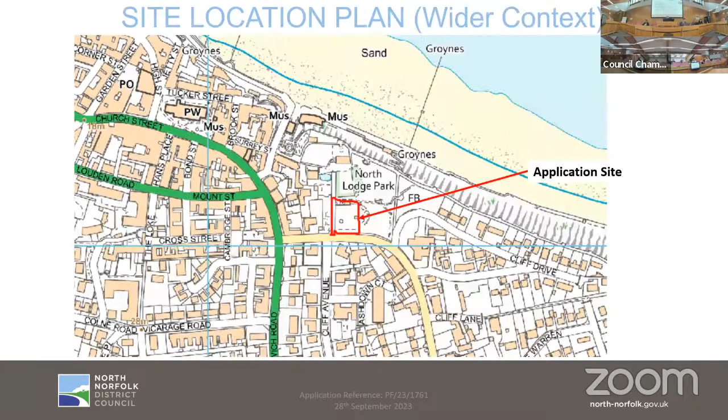So a map there for a bit more context. The park also forms the setting of the Grade 2 listed North Lodge. The former tennis courts and bandstand are considered to be an accessory to the asset.

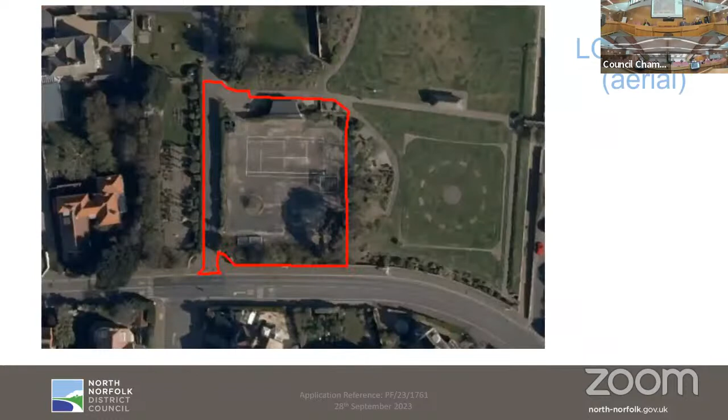The site as existing is comprised of a 1950s brick-built bandstand and a large concreted slab. Both have been unused for several years and have fallen into a state of disrepair, although the concrete area remains level and in reasonable condition. There's some photos just to show you the site as existing.

Below this, we have the horticultural hub, which is the fenced area containing a greenhouse, store and potting area, and a community shed. A portacabin is proposed to the southwest corner, which will be clad in vertical timber and sedum roof to match the other structures and would provide a food hub for the community.

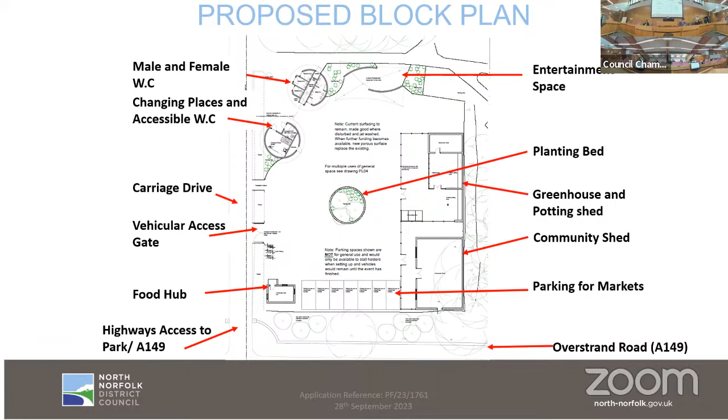Vehicular access is proposed from Carriage Drive along the western boundary of the site. There is vehicular access secured with a lockable gate and a further additional pedestrian access. Space has been set aside for occasional parking and cycle racks have also been provided.

The next few slides that will be shown are showing you a close-up of the plans of the structures.

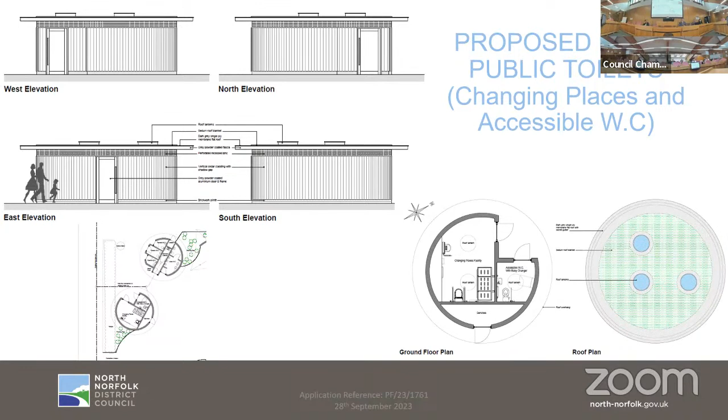This slide shows the proposed public toilets. They're circular, clad in timber and zinc, and one will have a green sedum roof. The next one has a polycarbonate roof.

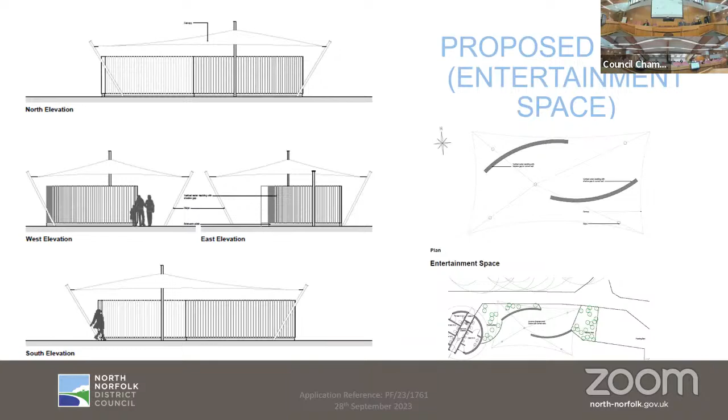This is the entertainment space. As I said, it's two curved walls, which will be clad in vertical timber and has a canopy above.

That's the community shed.

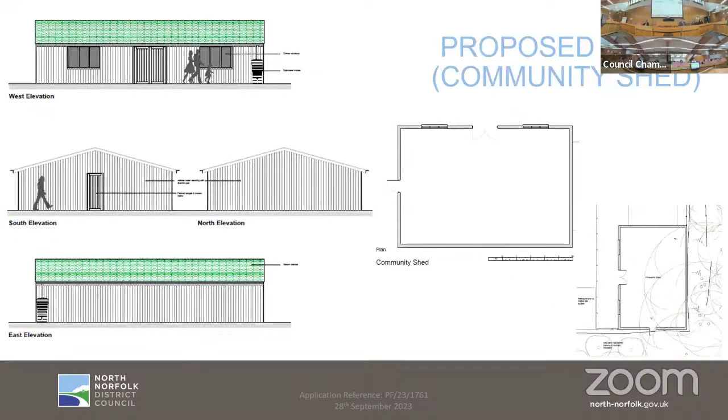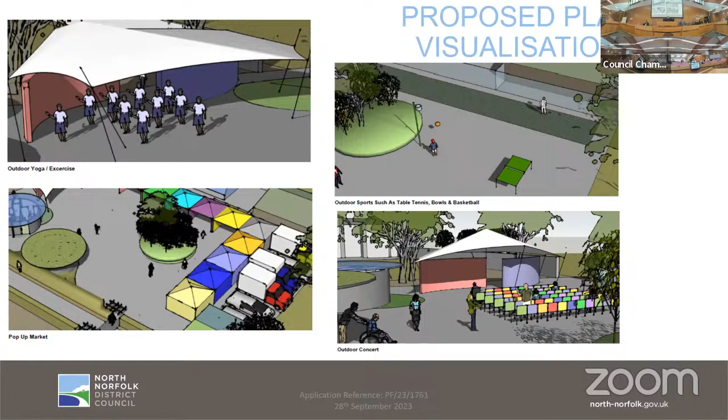The key issues for consideration on the scheme are highlighted here. In terms of design, the majority of the structures proposed are fairly temporary in nature, with low impact siting on the existing hard standing.

Whilst concerns have been raised in public representations regarding the open land designation of the site, officers recognise that whilst the proposals would not enhance the open character of the site, there would be an enhanced recreational benefit, allowing a currently underutilised area of park to be brought back into use and offering a number of recreational uses for the community. This is in line with CT1.

Some heritage harm has also been identified as a result of the concentration of structures in this area. Whilst the harm identified must be given great weight, it's considered to be at the less than substantial end of the spectrum. Nonetheless, this harm has to be weighed against the public benefits accruing from the scheme.

The public benefits associated with the proposal include the revitalisation and improvement of a currently unused area of park to promote and facilitate new recreational uses, as well as the provision of new public toilets, and a number of flexible community uses, some supporting the local economy, all ensuring the viability of the park.

Having regard to these benefits, and affording the identified heritage harm great weight, it's considered that these benefits would outweigh the identified harm to the heritage assets. Consequently, the proposals would be compliant with paragraph 202 of the NPPF, which deals with less than substantial harm.

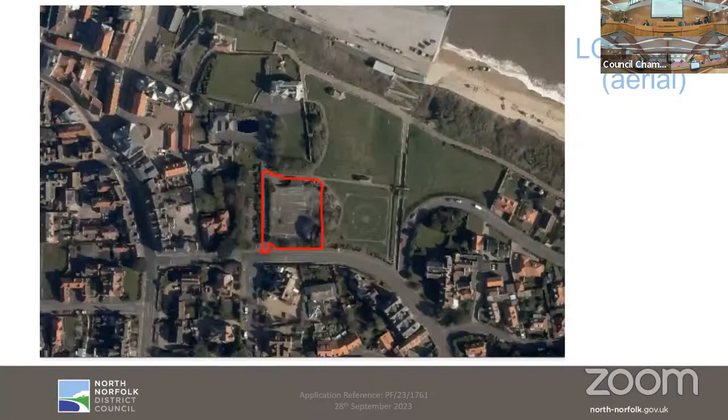Thank you, you've got 3 minutes, sir. If you just push the button on your microphone to make it live. That's the one, I got it.

Oh no, all right, well then, thank you Mr Chairman and committee for hearing me this morning in support of the North Lodge Park application. I just want to start by addressing the fact that we're looking at a 5 acre site here.

And within that 5 acres, the place we're looking to develop is 0.4 acres. This has been disused for a long time now, probably as long as I can remember, having been a resident of Cromer for the last 52 years. I spent many days down at Kiddie's Corner, as I'm sure some other people did, on the toys and everything else there.

The proposal we're bringing forward this morning, I think we need to consider that the regeneration of the park, particularly that area, is essential to residents and holidaymakers alike in Cromer, to make this area once again outstanding and draw people into that area of Cromer.

Unfortunately, for a long time now, it's been disused. We've seen an increase in vandalism and disorder in the park, and I personally think that if it's redeveloped with the use of CCTV, which we now have in operation in the park, this will obviously reduce the vandalism, antisocial behaviour, and gatherings there.

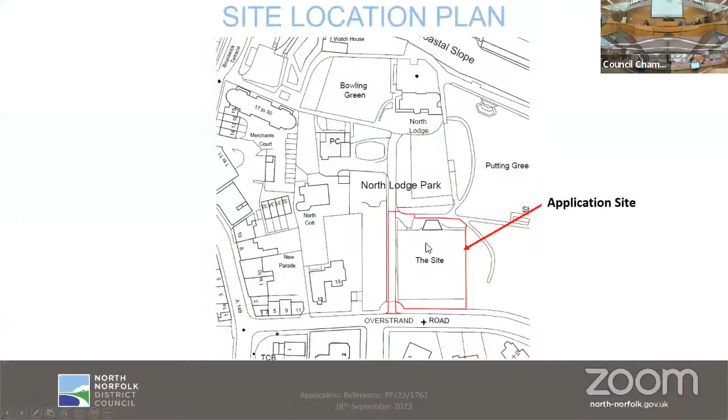I'm here today to speak for a family member who spoke in June when you were asked to approve an almost identical proposal, but you rejected it. You decided the conservation area wasn't suitable for wooden sheds, shipping containers, and a polytunnel. Now you're being asked to approve almost the same thing. A Portakabin built to last 60 years replaces the shipping containers, but looks remarkably similar, and there's a greenhouse instead of a polytunnel.

Just 2 small changes. NNDC has let this land fall into decay. Now they want to pass it on to Cromer Town Council, who will pass it on to charities to develop. The charities must provide everything: buildings, fencing, electricity supply, all at huge cost. Because this land is public realm and there's public benefit, you've been told this is okay.

But this land is also open space, and so there are more rules that need to be followed, and they haven't been. The National Planning Policy Framework, paragraph 98, says there must be robust and up-to-date assessments of what open space sport and recreational provision is needed. This hasn't been done for North Lodge Park. In fact, it's 11 years since the last official report.

Paragraph 99 advises open space should not be built on unless it's surplus to requirement, or the development is for alternative sports and recreation, the benefits of which clearly outweigh the loss. All of these charities and organisations provide benefit.

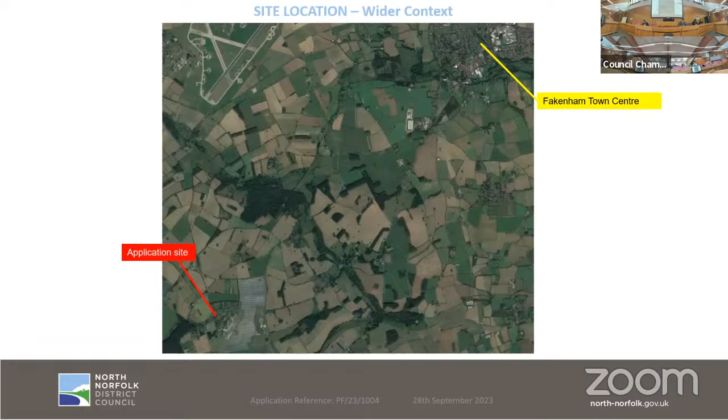This application has been called in for your consideration for the reasons set on page 22. Next slide. The site location plan situates the application site in the village of West Raynham, 6 miles southwest of Fakenham. West Raynham is not identified as a service village, and therefore, for policy purposes, it is designated as countryside.

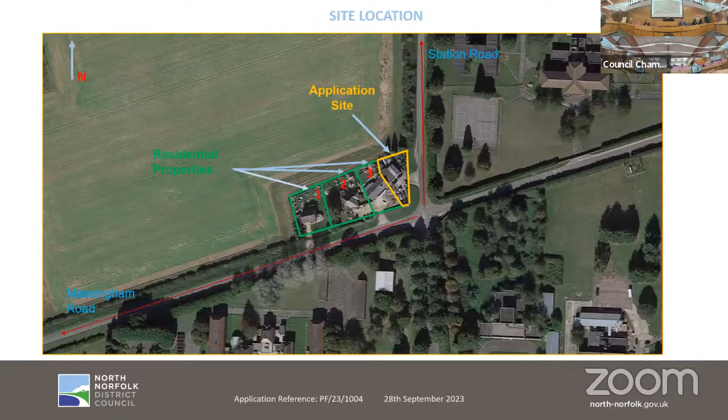Next slide, please. As you can see on this slide, the application site is adjacent to a group of 3 properties and also at an intersection between 2 local roads, Massingham Road and Station Road.

Next slide. The aerial view of the site allows us to see the auto clinic in its wider context. As you can see on the slide, the garage is located in close proximity to both the former RAF West Raynham and a business park.

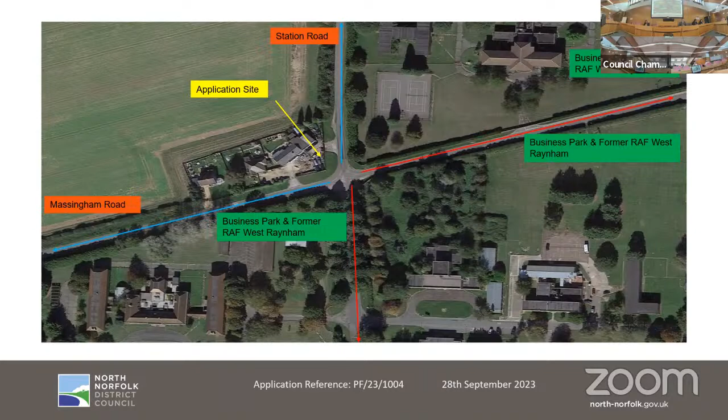Next slide, please. As stated on the previous slide, the garage is adjacent to a business park that currently hosts approximately 13 businesses. In conjunction with the neighboring Enterprise Park, the garage is located near the former RAF West Raynham, where 13 buildings hold a Grade 2 listed building classification. The Conservation Officer found the proposed development not to have an adverse impact on the environment surrounding the Grade 2 listed buildings to the south.

Next slide, please. The district contains 4 former defence establishments, and West Raynham is one of them. We know that such an establishment would have created significant levels of housing, despite the fact that key services and facilities are lacking in this area, which would make such a site an unsuitable location for new housing. Due to the site's isolation, any new residential development would lead to increased car journeys and would not be in conformity with the settlement hierarchy.

The red cross-hatched area on the policies map is defined as an airbase technical area, indicating where employment development is focused. The surrounding area is identified as a countryside policy area, including the application site.

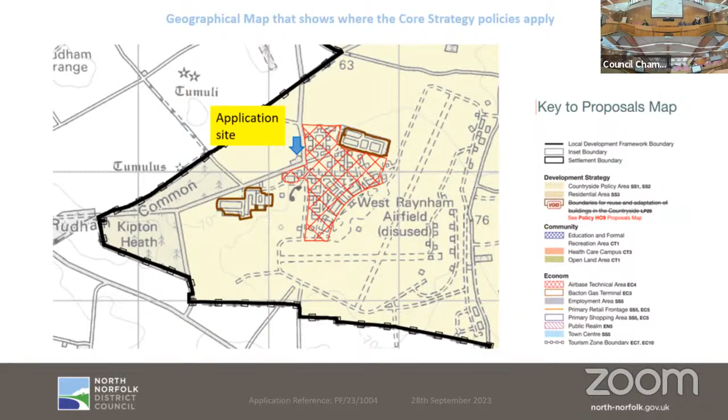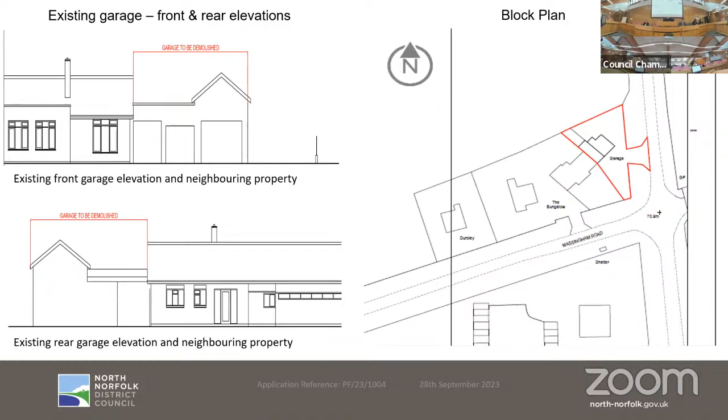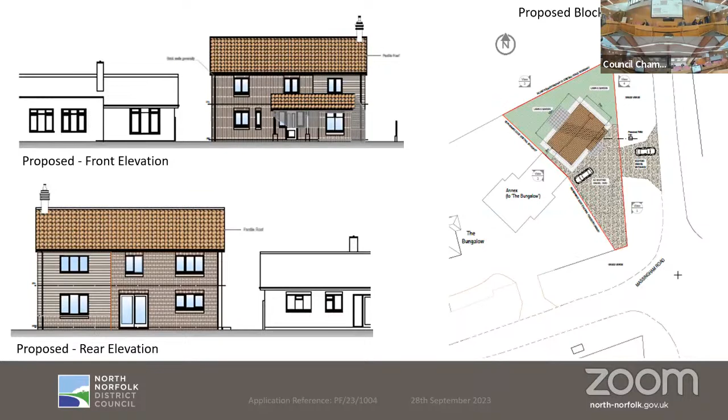The proposed dwelling would be set back into the side with a gravelled area to the front, with parking and turning provision for a minimum of 3 car spaces. The site is presently accessed via Massingham Road as per the proposed block plan. Highways found this present setup to be acceptable as it does not affect the current traffic patterns.

The future occupiers would therefore be dependent on the car in order to access such services. The proposal would be an unsuitable development. A single dwelling in this location is unlikely to significantly enhance the local rural community vitality. The modest contribution in terms of economic and social benefits would not outweigh the strategic policy conflict. In the opinion of the local planning authority, there is no justification to permit this dwelling in the countryside, which would be contrary to policy SS1 and SS2 of the North Norfolk core strategy.

The second issue of this scheme is the proposed design. The proposed development, by virtue of the building's overall size, scale and location, would result in an unsympathetic form of development, appearing to be out of place and excessive for the available plot, particularly concerning its proximity to the neighboring property on the left with a mere 2-meter separation between them. The constraints of the width of the proposed plot mean that the new dwelling would be in close proximity to the existing neighboring dwelling to the left, which would constitute an overdevelopment of the site.